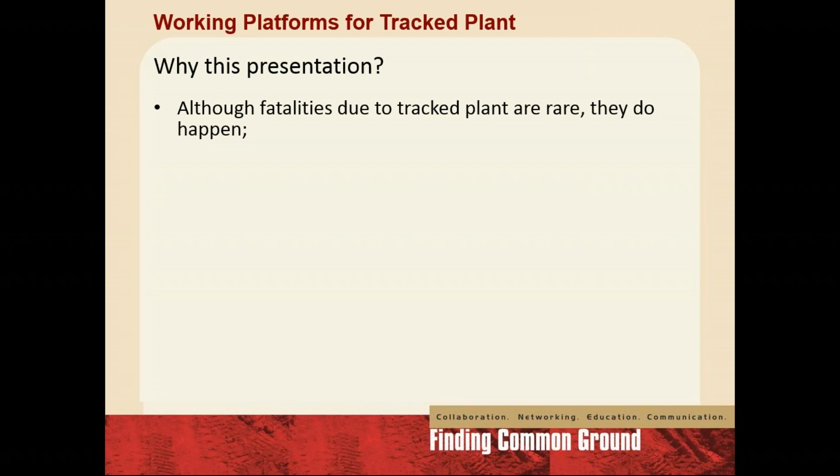Why this presentation? Although fatalities due to rigs and track plant toppling over are rare, they do happen. And we know that worldwide, the safety record for the construction industry is very poor. So if we can raise awareness of safety issues and make our sites safer, we can reduce the economic and human cost of poor working platforms specifically.

And who knows, through today, we actually might save somebody's life down the line.

So I just want to cover some experiences with what we've found in the UK, particularly through an organisation called the Federation of Piling Specialists, which is a UK organisation. It's affiliated to the EFFC, the European Federation of Foundation Contractors, and it's a trade organisation comprised mainly of practitioners.

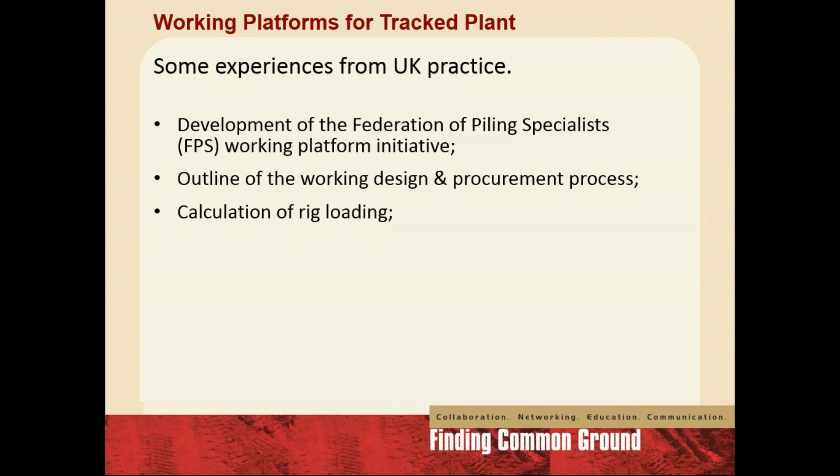So they developed a working platform initiative, and it's a whole process. I want to cover a little background about what that process looks like, and then go into more detail regarding one aspect - if you're going to design a working platform, you've obviously got to know what loading is applied to it. Then we have a spreadsheet tool, which is freely available, which I'll go into in more detail. And then once you've got the loading, a little bit on how the platforms are designed.

Now, if we go back to early 2000s, it was recognized that the incidence of piling rigs falling over because of poor platforms was too high, and it was something we could do something about. So that's why the Federation of Piling Specialists, the FPS, launched their working platform initiative. They wanted to promote safety, but in a way that was economic and sustainable.

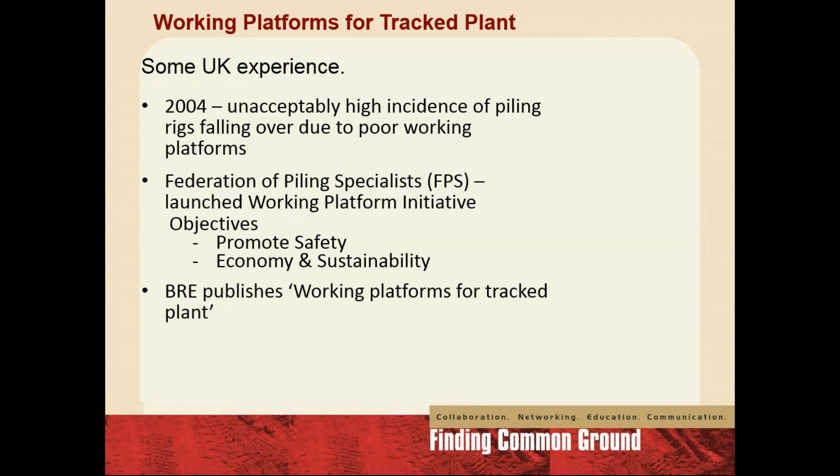They did a lot of work themselves, but then engaged an organization called the BRE, the Building Research Establishment, which was at that time a quasi government body that held the leading position in research and development in the UK. And they published a document, a little book called Working Platforms for Tracked Plant.

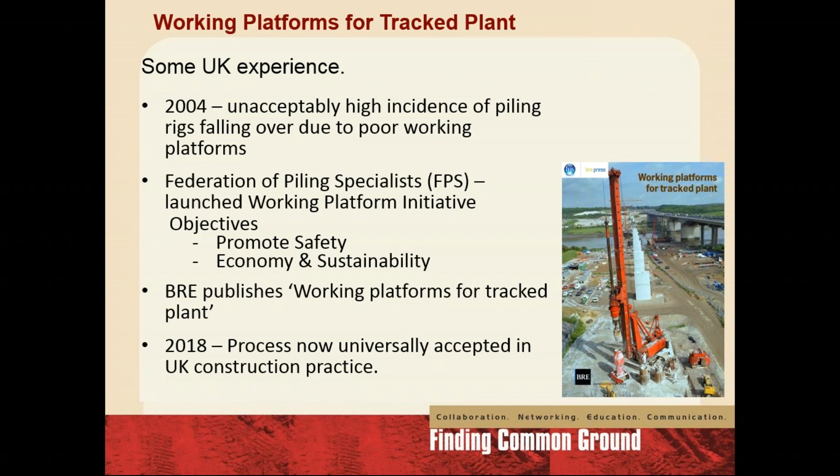This appeared in 2004, and since then the whole process for providing working platforms, not just for piling rigs and the like, has seeped out into wider industry. Obviously cranes are the next thing you might think about, but track plant, raised platforms, wheel platforms and that sort of thing are also now covered by some of these aspects.

In terms of creating a safe working platform, there are numerous facets and aspects to consider. I sat in yesterday at the working group meeting here, and we were talking about sort of bubbles, and within each bubble are different areas and aspects of creating a process to improve our safety.

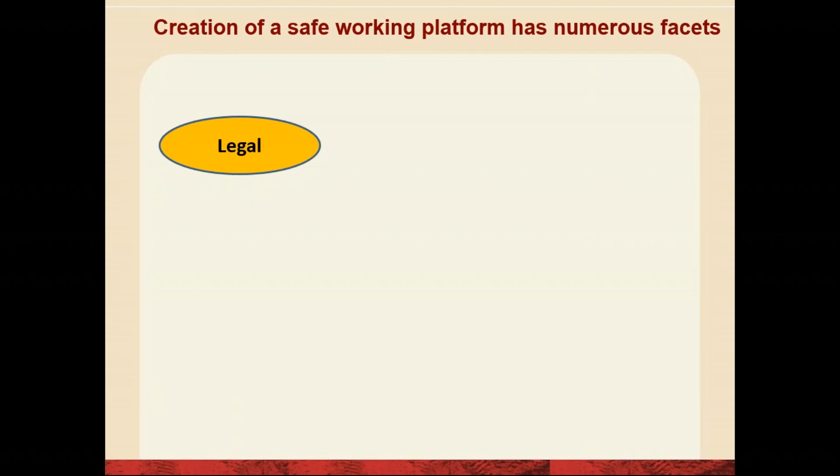So one is the legal framework. Another aspect is what is your contractual and commercial relationship with your client - you've got on your construction sites the controlling entity, who is the person overseeing the whole site. What's your relationship with them? My experience working for Keller in the UK for many years - as a subcontractor, you feel like you're at the bottom of the food chain sometimes. So how do you influence?

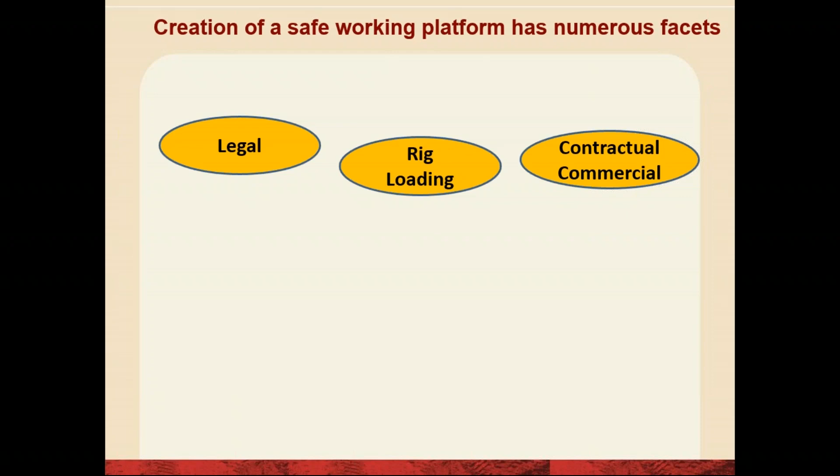Then, obviously, if you're going to design a platform, you need to know what forces are being put on that platform. So that has to be considered. And then you have to do some calculations to come up with the platform thickness.

The construction of the platform obviously has to be in accordance with the design. One challenge is that we can do a design based on a borehole or trial pit at one discrete location, but if we've got a 40,000 square foot site for a warehouse, how do we make sure our design section is applicable across the whole site? How do we inspect the formation before we put the platform down, to make sure we haven't got unforeseen holes or service trenches that haven't been properly backfilled? So construction is a very important aspect, as is validation.

How do you validate your platform? In the olden days, it was the foreman's boot, the heel of his boot, but really I think we've all realized that kind of doesn't really cut the mustard anymore.

And once the platform is being used, it has to be maintained and, if necessary, repaired. There was one UK incident where there was a piling site, and the platform had been put down in a good way, had been well designed, the rig loadings were understood, and a piling rig went over.

Later investigation found that over the weekend, somebody had come in to do a service diversion, which they had done. They hadn't fully backfilled the trench, although they had reinstated the granular mat over the top of it, and the rig, when it tracked over that improperly backfilled trench, went over.

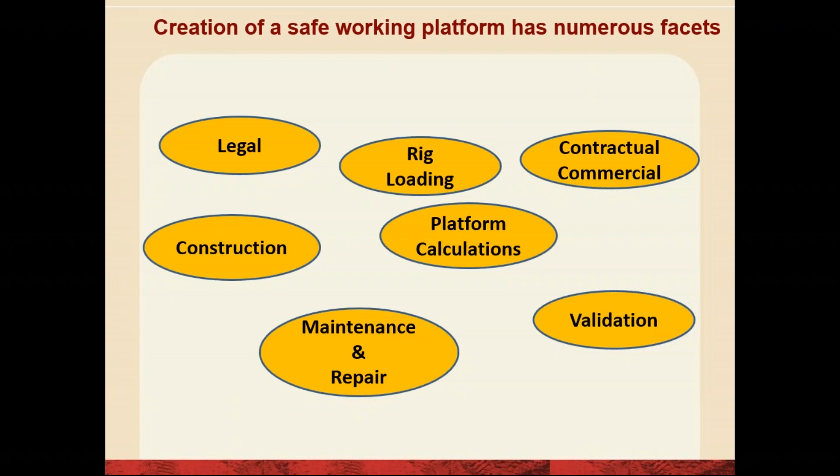And all of these little bubbles fit in a bigger bubble, which is, you know, we've got to try and be cost effective, and we've got to really be trying to add value as well as making things safe.

And of course, there's another thing we often don't consider, which is our moral obligations. I'm kind of quite big on this, really, for no other reason than we want our guys and girls on site to come to work in the morning and go home at the end of the day. If we can improve the chances of them doing that, that is good.

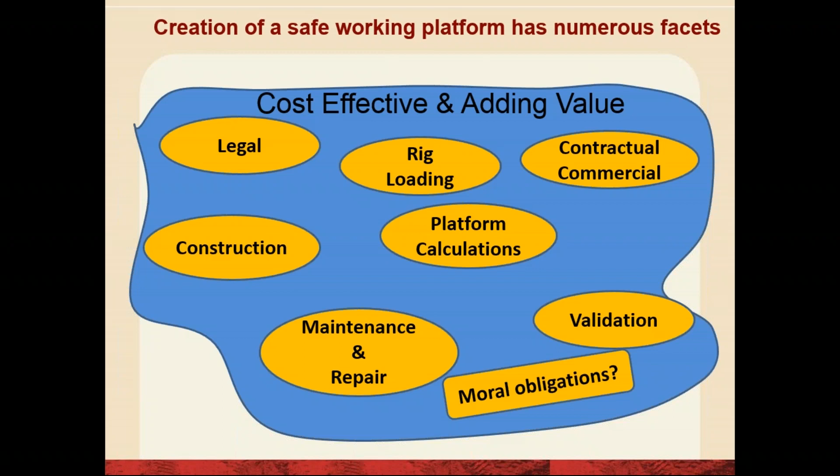I read a horrendous statistic. I was looking at a website, I think for the US Department of Labor, and it said that over the lifetime of a construction worker, say 45 years, there's a 1 in 200 chance of them being killed. I'm not saying the UK is significantly better, or other parts of the world are significantly better, because we know that worldwide construction is not as safe as it should be, but that's a horrifying statistic.

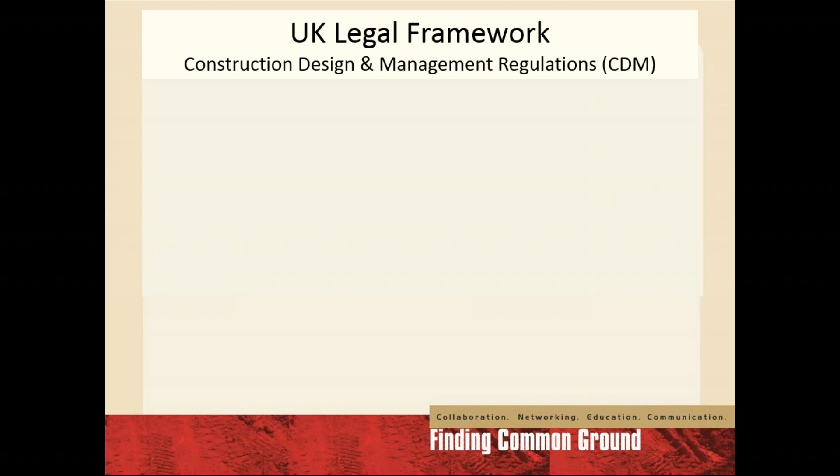So I just want to outline a little bit about the UK legal framework, because this is the way we do it, but if other people are going to take on some sort of process and initiative, it's going to have to be framed to suit your environment.

So we have what we call the client, who's the person developing a site. They have responsibilities under law to make sure they are appointing people to look after health and safety.

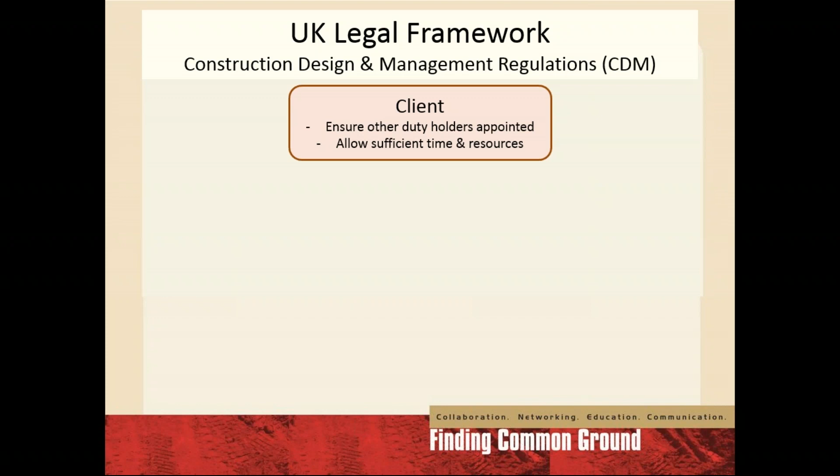At the design stage, pre-site work, there's an entity called the principal designer, and they have to identify, eliminate, and control the risks that they can foresee. And if there are sub-designers, the principal designer has to make sure that they are fulfilling their roles.

So you can argue that the principal designer is also responsible for ensuring there's enough ground investigation information to design a safe working platform, because they have to have thought about how whatever they're designing can be built in a safe way. And then when it gets to construction, you have a principal contractor.

Now this may be your controlling entity. I'm not sure whether it's that person or whether it's the client. But when it gets to construction, they are responsible for planning and managing and monitoring all aspects of health and safety.

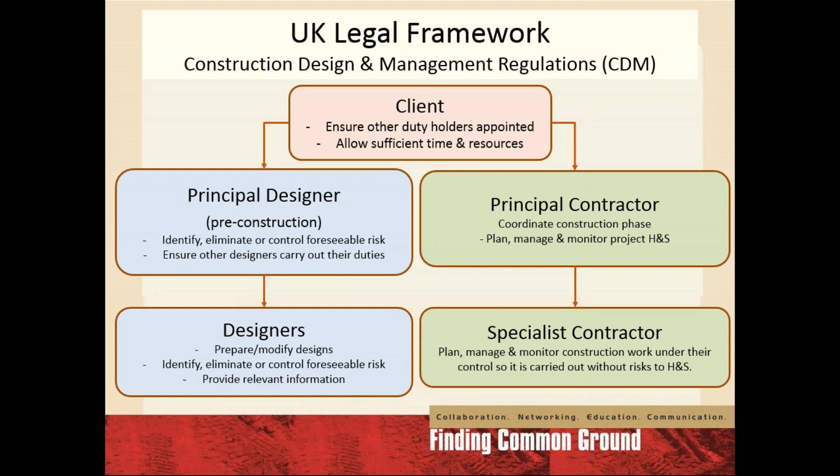And then if we have our specialist geotechnical contractor, they sit underneath the principal contractor. They do have responsibilities to make sure their work is carried out safely, but that's under the umbrella of the principal contractor.

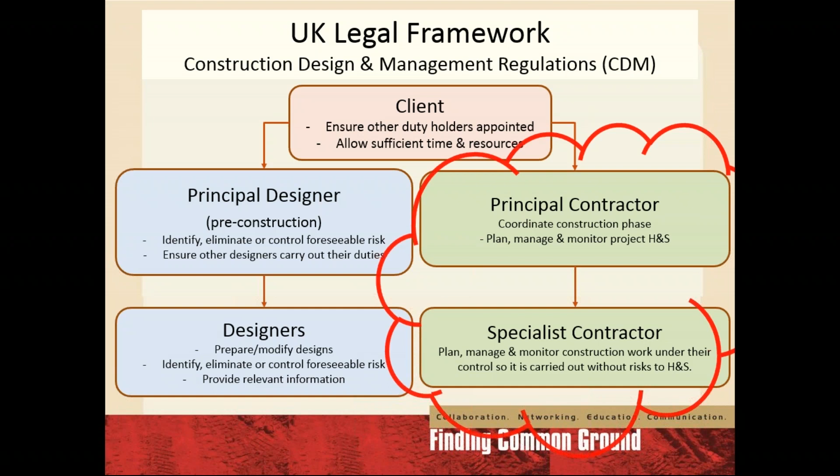And really, when it gets to site, it's the people in that red cloud, and it's that area we're often talking about where we're operating.

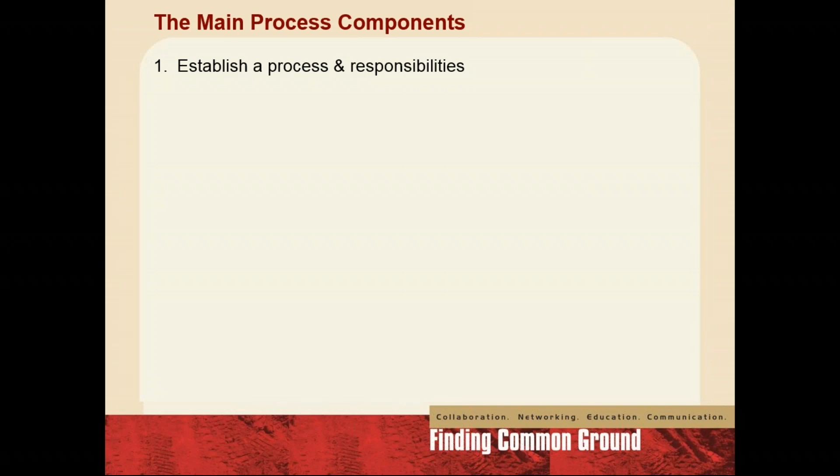Okay, so the main process and components we follow is, firstly, you need to establish a process, and you need to establish who is responsible for what. Once that's done, then you get into the nitty-gritty technical stuff.

You can establish the site conditions, so you need to know what the ground is, and topography is also very important, particularly if there's going to be cutting and filling going on, because the borehole or trial pit commencement level may not be your working platform formation level.

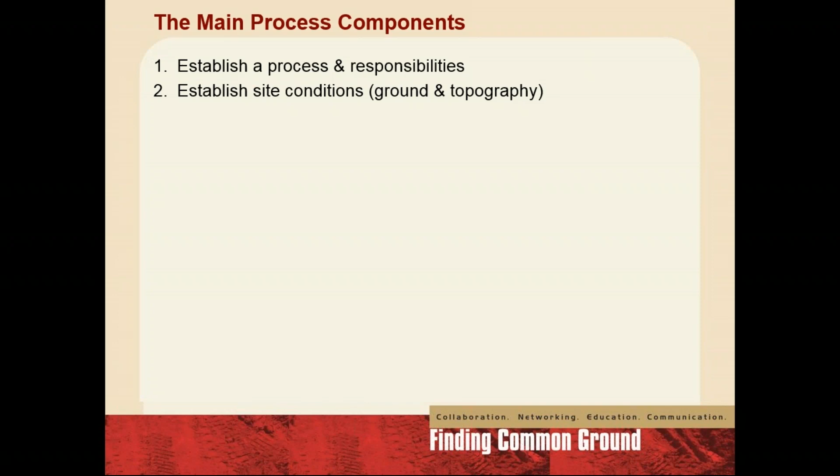Then you obviously need to design the platform for your known loadings, and we'll come to that in a little bit more detail in a minute.

Then you design your platform, so you obviously assess your subgrade strength, you select your platform material, and if you're going to use geogrids or geocomposites, select what they might be, and then do some number crunching, some design calculations to give you a platform thickness.

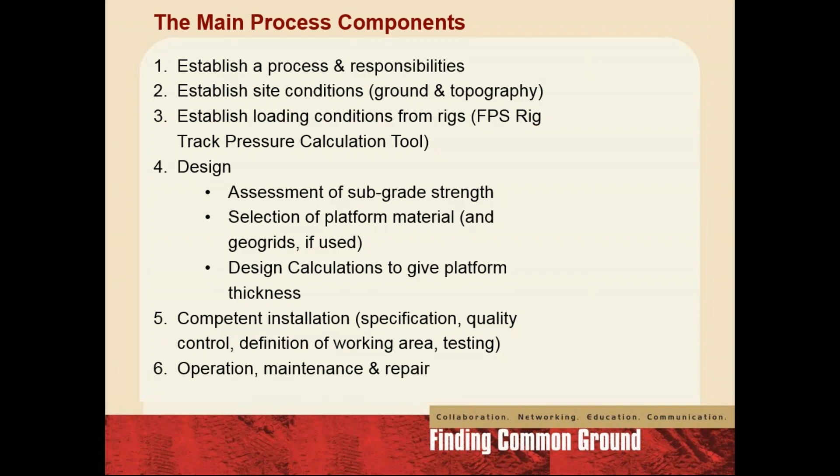But it doesn't just stop there. It's very important that there is competent installation. So you need a specification, there needs to be some sort of quality control, some definition of the working area, and testing maybe of the platform. That vigilance needs continuing through operation, maintenance and repair. And to embrace all of these aspects, you need some sort of management or control system.

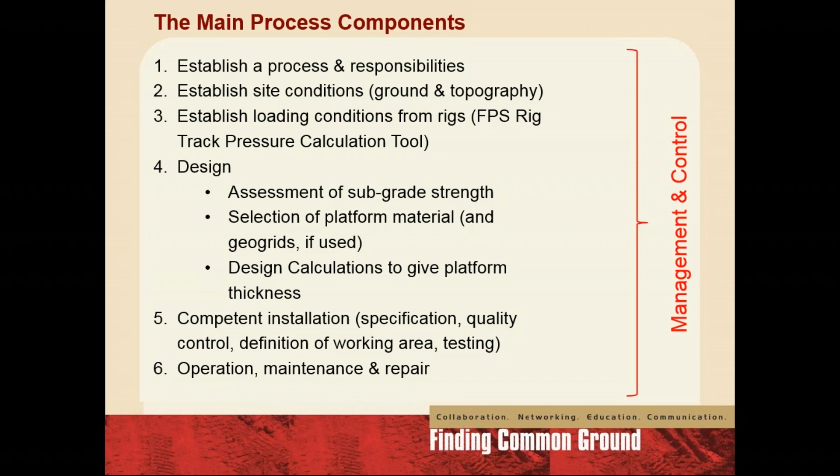In the UK, that's done through a very simple form. We call it the Working Platform Certificate. I'm led to believe the word certificate can have a bit of a loaded legal connotation in the US, so you could call it the Working Platform Form. Perhaps there's too many forms, but something simple to help guide us through the process.

It summarizes what the project is, what part of the project you're working on, and what loading the working platform has been designed to operate under. It puts the designer's name, an individual, so we're identifying and naming individuals now, creating where the responsibility lies, the designer organization, and any testing that is required.

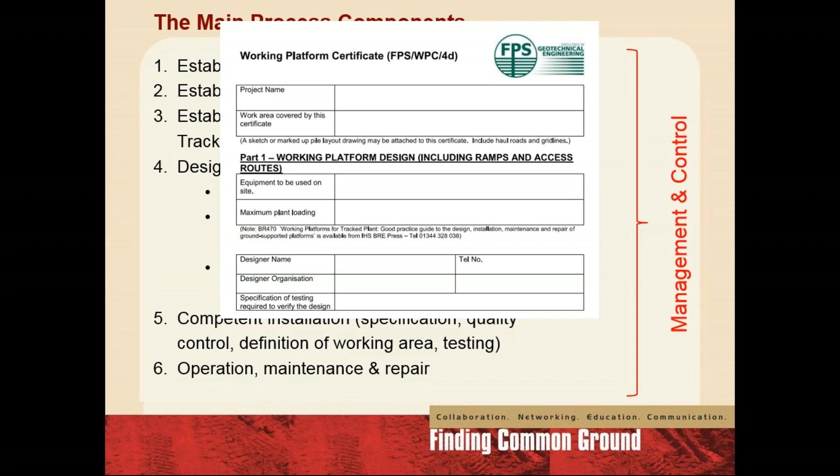And then the principal contractor, which maybe in your circumstances would be the controlling entity, has to sign in ink or blood to say that they are confirming the platform has been correctly designed, correctly installed, and will be correctly maintained before the piling contractor goes onto the site.

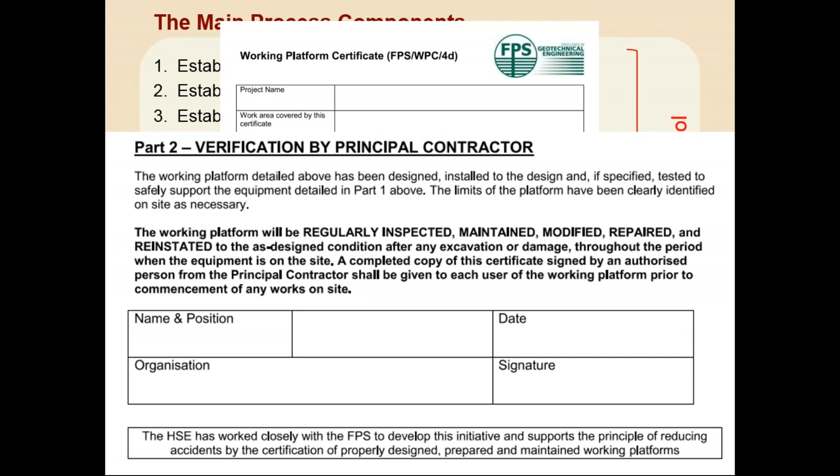In 2004, the FPS had created an earlier version of this form, and they collectively said, we are not going to work on sites unless the principal contractor has signed this form. At that time, there was a lot of wailing and gnashing of teeth, particularly from maybe some less well-informed clients. They said, oh, this is dreadful, this is dreadful. But the FPS members stuck to their guns. And in time, it's been recognized throughout the industry, not only for FPS members, but also non-FPS members now, that they're not going to go on site unless this form has been completed by the principal contractor.

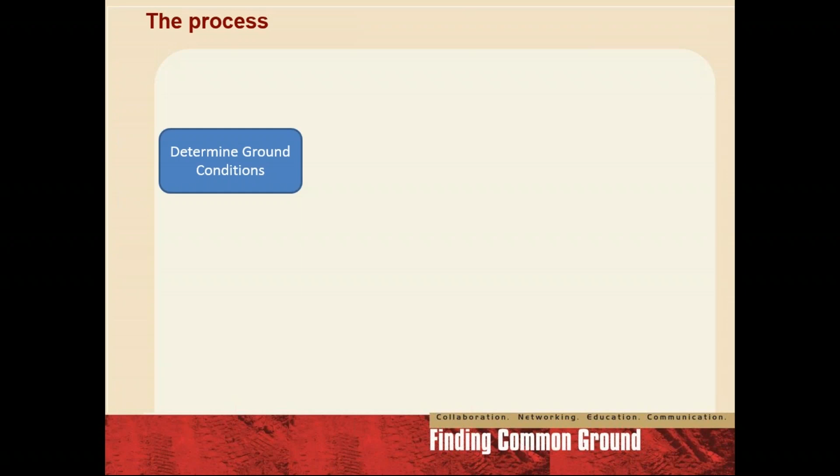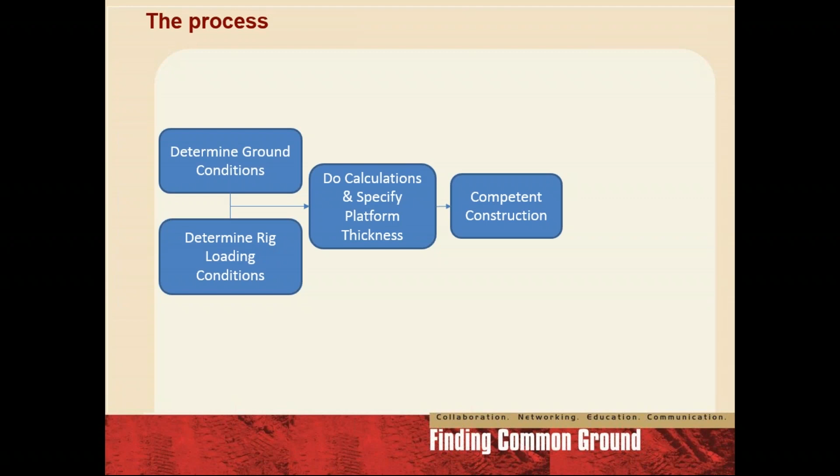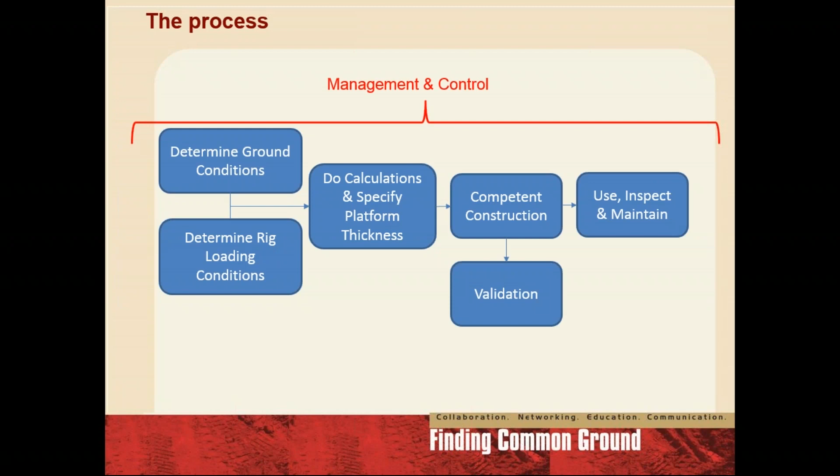So just to summarize the process, or show it pictorially: once you've established your responsibilities from a design point of view, established your ground conditions, determined your rig loading, done your calculations to determine your platform thickness, had some construction done by a competent person, validation perhaps required, you then use, inspect, and maintain until the end of the life of the platform. And that's all overarched by this management and control process.

The title of my talk this morning was prefaced as a workshop. And what I want to do now is go through, very quickly, a tool that's freely available. It's an Excel spreadsheet tool, which was developed by the FPS in the early 2000s and has undergone some fairly recent revisions to make it a bit more user-friendly.

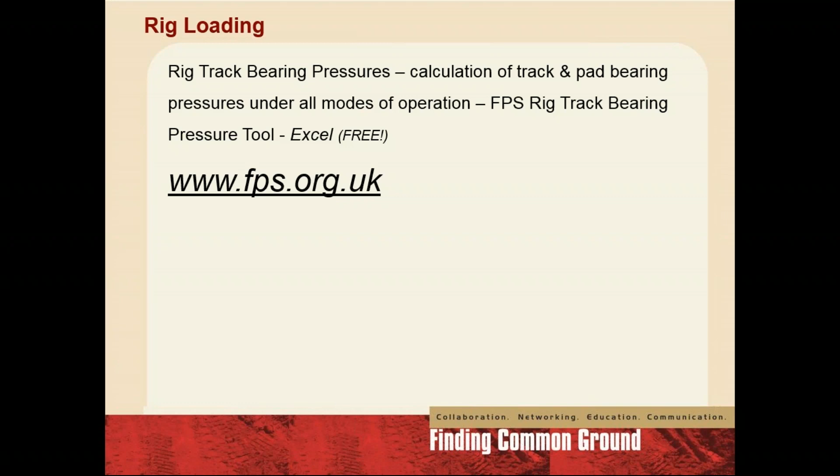I think it's going to be quite difficult in this environment to really get down to the nuts and bolts of that. But if you've got internet connection, you may go to www.fps.org.uk, and you'll find the website, which if I go forward looks like that. You can click on the little button and download the spreadsheet for free. There's guidance notes there as well, and some examples.

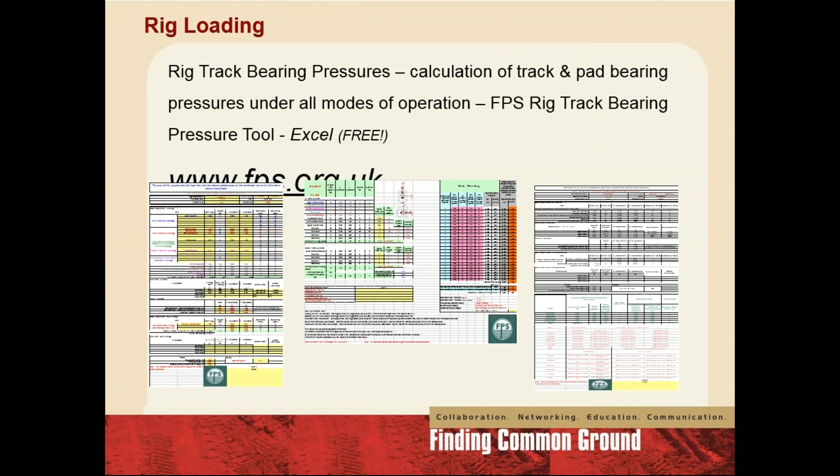So the spreadsheet tool comprises Excel forms that you complete. The aims of the tool were to try to make it as simple as possible to use, something that would give consistent and reliable results, and it would cover most of the usual piling rig situations. It's routinely used for the larger rigs, even 100-ton rigs, down through the more routine ones we have in the UK.

I think you call them auger cast piles, we call them CFA piles, CFA piling rigs, anything from 80 down to 30-odd ton machines. It's also used for the mini rigs, going from the 1 to 2 ton machines up all the way to the 100-ton machines. It's for the most usual situations, really implementing the 80-20 rule. There will always be exceptions, but these need to be considered as exceptions, again by a competent person.

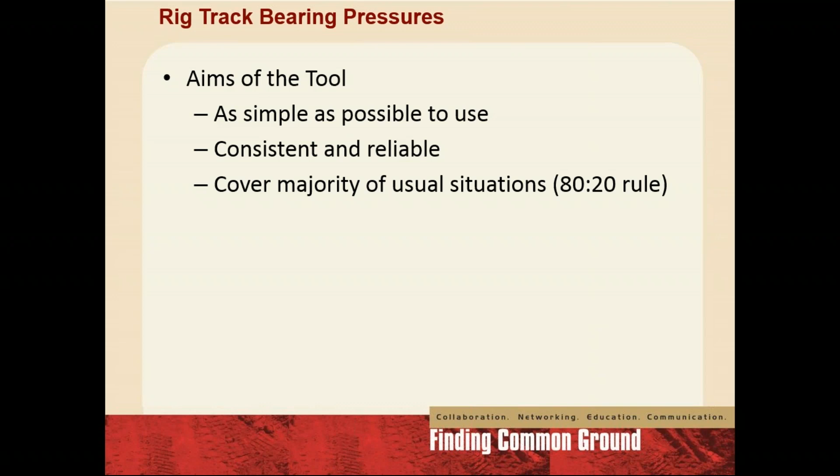As I said, the tool's freely available, and there's some guidance provided. In the UK, we do run training courses, usually half-day long, and people actually come along with their laptops and are guided through examples, given the theory and the background. That means people are being trained in the use in a consistent way across the country.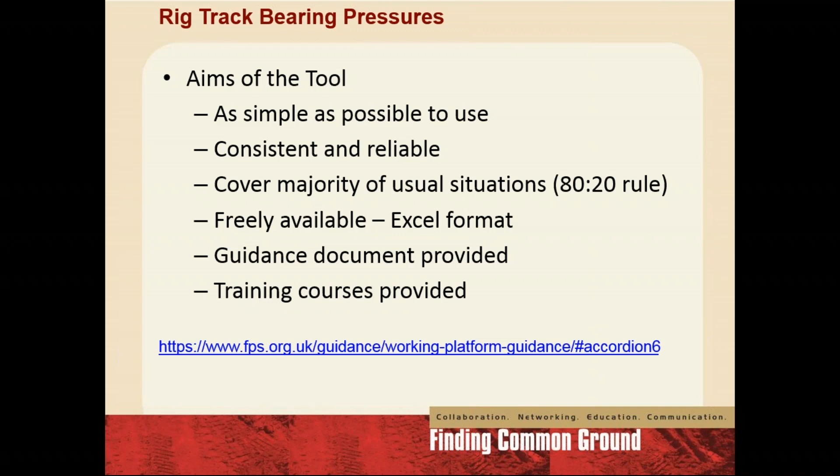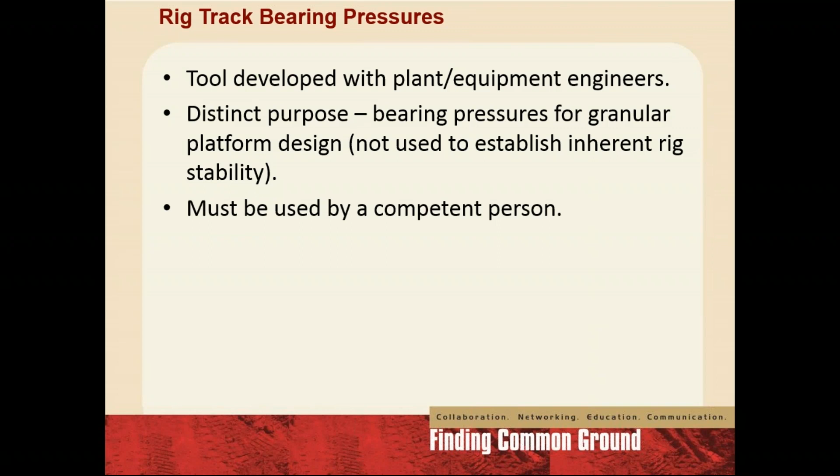The tool was developed by engineers, including a lot of people on the plant health and safety side of the construction industry. It has a distinct purpose: to assess the bearing pressures that are applied by rigs on granular working platforms. It's not used to establish inherent rig stability—there are other codes and standards that do that. And really, the term competent person is quite crucial here. My definition is a competent person is somebody who will have knowledge, hence the training, and some real-world experience of what rigs look like and how they work.

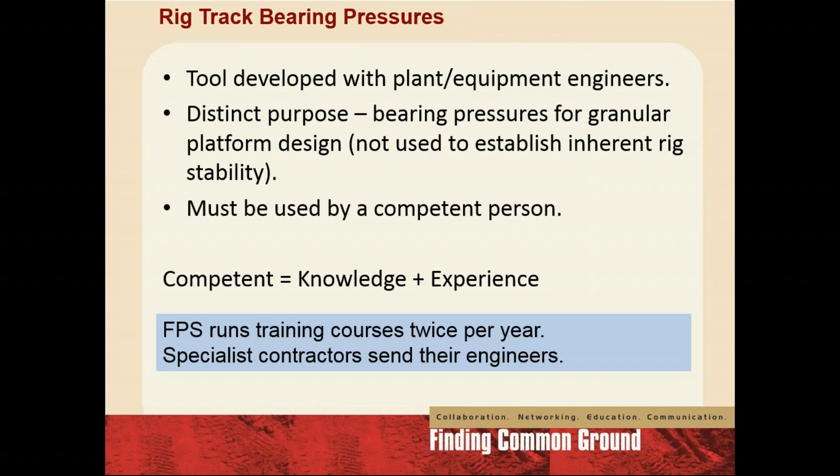Okay, so we've just seen that's the spreadsheet. Sorry, that's the website. If you go to the FPS website, you can click one of the little boxes and download the tool. So what does the tool do?

It calculates the track, and if you've got footpads or outriggers, their bearing pressures. It considers all the different modes of operation of a rig, and if it's a slewing rig, all the slew angles. And then the output has to be compatible with the platform design method.

And if we go back to the document BRE 470, working platforms for tracked plant, which again you have to buy, but you can buy it off the internet from the BRE website, it does give a design method. There are other design methods as well for the actual working platform.

Essentially, the spreadsheet has 3 main components spread over a number of worksheets. The first, as you'd expect, is the data entry. Obviously you're not going to be able to read this, but you can see it looks fairly daunting, but isn't really that daunting when you get into it. So you put basic data in there.

There are then provided with the sort of routine download, 6 spreadsheets that will consider different modes of operation of a rig. So there's the standing mode, there's the traveling mode, so that is the rig obviously tracking around.

Handling, which may be for preformed piles, precast piles, tubular piles, can be quite critical. Could incorporate unloading from lorries and what have you. Then there's the penetrating mode, the extracting mode, and I'm going to come and talk about those in a bit more detail in a minute because they're treated quite specially, the penetrating and extracting modes.

And then you've got a spare spreadsheet, but if you know the password to unlock the spreadsheet, you can of course add many more operating modes if you want. And then there's an output summary.

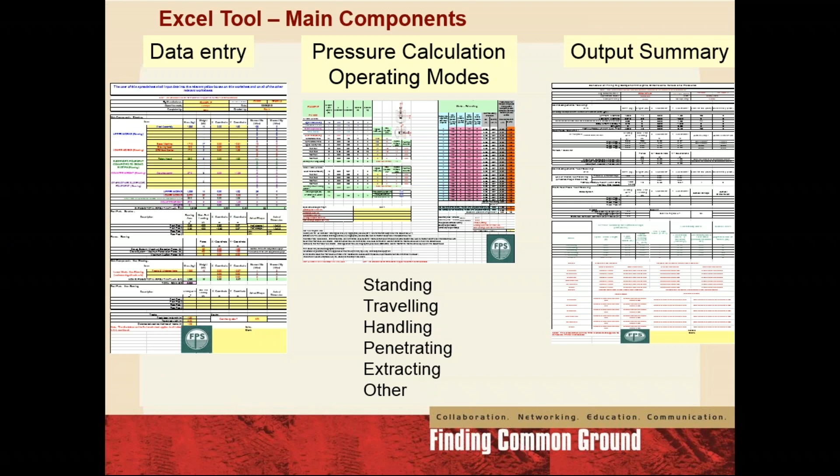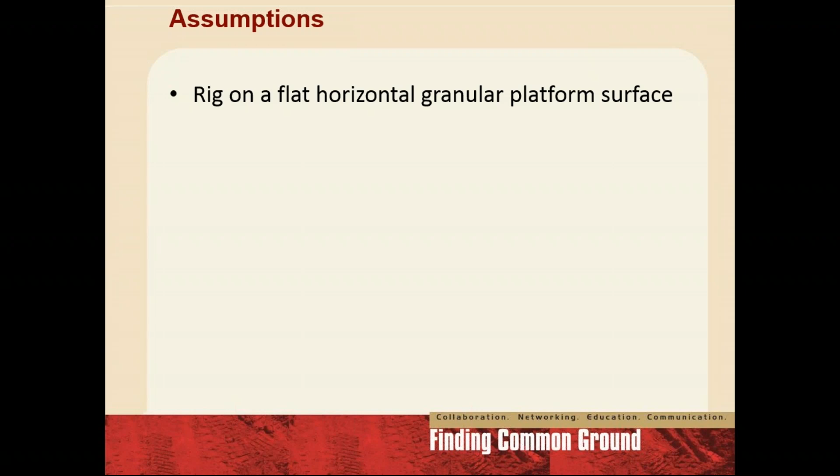So some of the basic assumptions we're working with here is that your rig is working on essentially a flat, horizontal working platform, not on a steep slope. And we use a rule of thumb of about 1 in 20, anything less than 1 in 20 gradient as being considered flat. And the forces derived from the use of the rig

are vertical. If your winch forces, the assumption is that they are operating vertically and you haven't got large lateral loading. And that your rig is not going to be exposed to high wind loads, high slewing loads, and high dynamic force loads.

Now, the resistance to the rig, the thing that stops it falling over, is provided by the tracks. And if you've got any outriggers or footpads, they're also considered.

As I've already said, the masts and winches are considered to be operating vertically, you'd have to go in or do some pre-processing if you're going to start imposing lateral or semi-lateral loading.

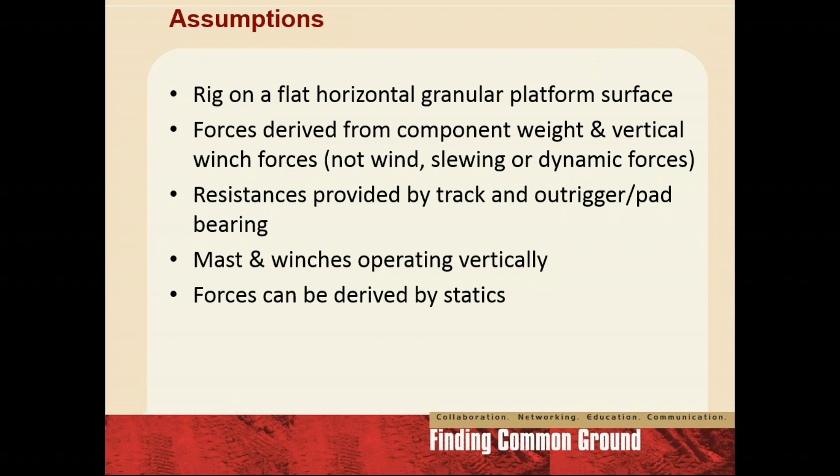The forces that we will use to calculate the bearing pressures are derived by statics, so fairly basic engineering and maths. And obviously another assumption is, and it comes back to the use of the competent person, that they know what they're doing.

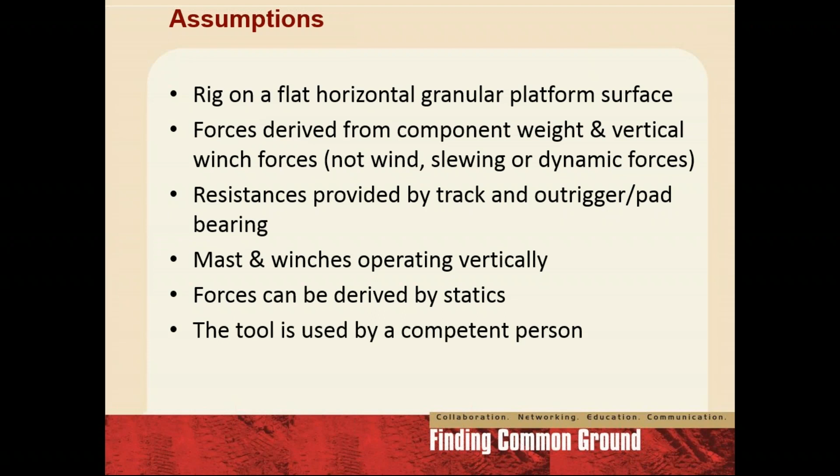So, for example, you'll need to know what the weight of the tracks is, and the tracks are the non-slewing components of the rig at the bottom, the main body of the rig, counterweight, all that sort of stuff, which are part of probably the slewing components, mast, etc.

You need to know their weights, and you need to know the distance from the center of rotation of the rig, or the centroid of the tracks, where those weights are applied.

Finding that information from rig manufacturers' documentation has improved quite significantly. Most modern rigs, certainly within Europe now, and their manufacturers will provide this information quite readily.

Maybe if you've got older rigs, or if that information is not so readily provided by the rig manufacturers, you might have to go to the time and effort of taking bits of your rig off, weighing it, and measuring where its center of gravity is with respect to the middle of the tracks.

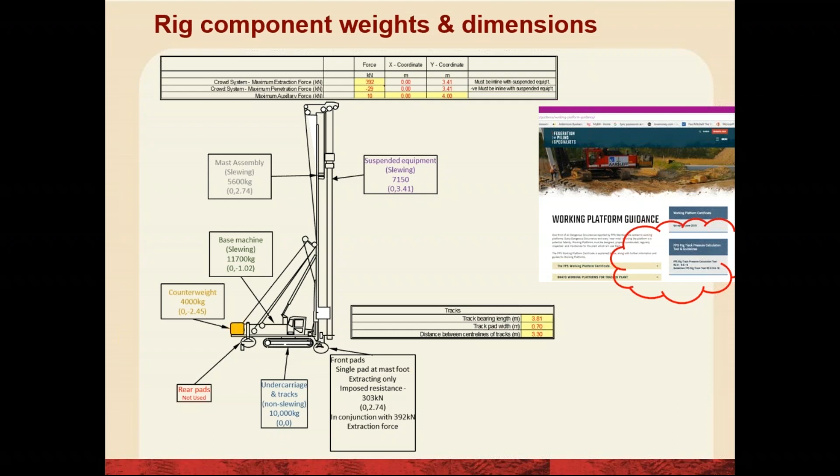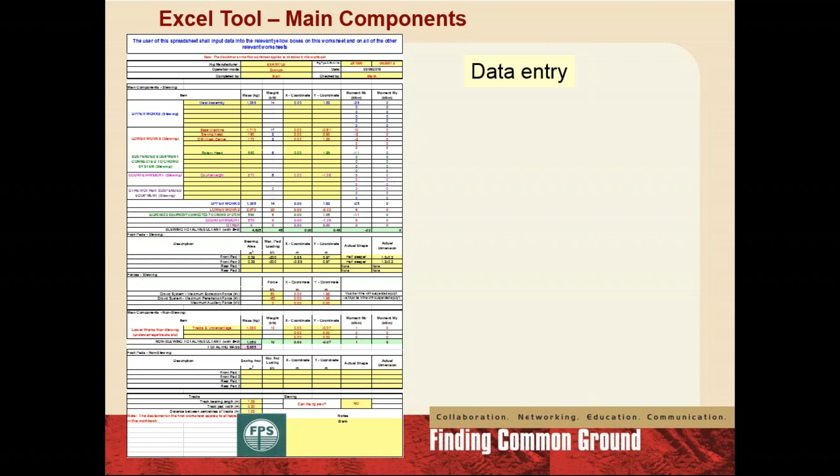Pressure calculation, which covers the different operating modes, and this is really the engine of where the calculations happen.

The basic principle is that we just consider the static equilibrium equations of the rig in its working configuration. So whether it's standing, it'll have certain forces applied. If it's traveling, it'll probably be the same forces applied as standing. But if it's handling, penetrating, or extracting, there may be winch forces that we need to consider.

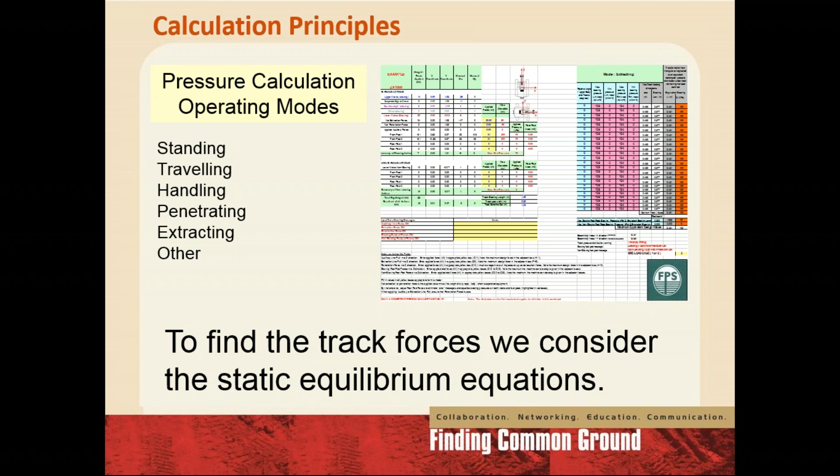And we can consider them fairly simply, really. Because we know the weights of the different components and we know the distance of those components from the centroid of the tracks, we can take moments, and we know our vertical equilibrium equations because we know the rig is sitting on a platform, and we know the resistance. Sum of the resistance generated by the platform has got to equal the weight of the rig plus any winch forces.

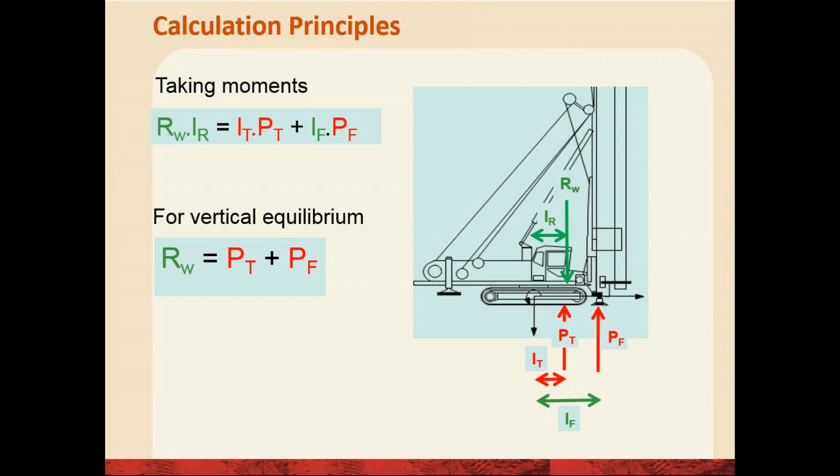And if we've got a foot pad, that's also part of the equation. Now, the trouble is, if we've got a rig with 2 tracks and 1 foot pad, and we look at our equilibrium equations, we discover that it's a statically indeterminate problem, so we can't solve the equations.

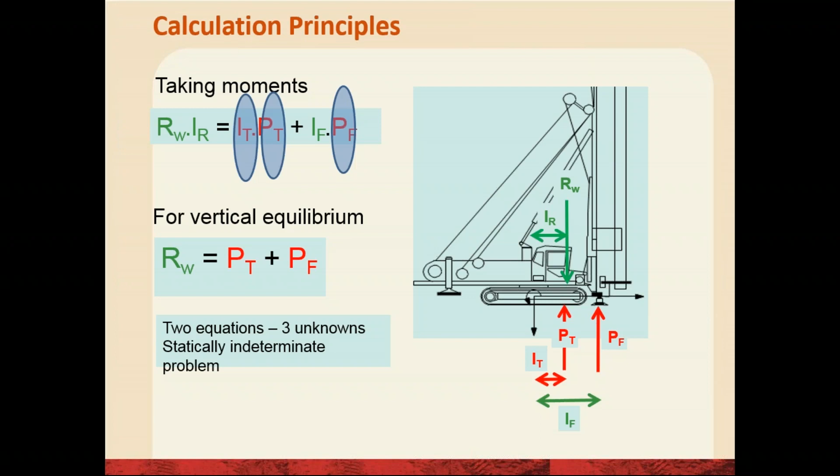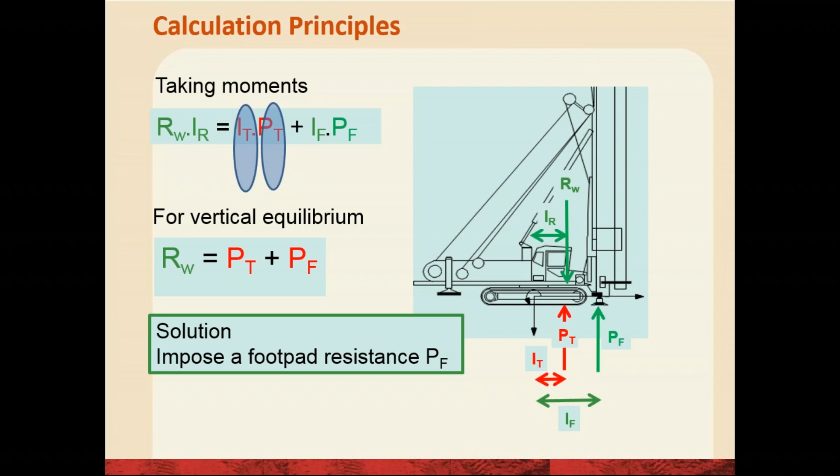And the way around this was to allow the operator to impose a foot pad resistance. And by doing that, we render the equation statically determinate, and we can solve the problem and then work out what the bearing pressures are. Now, it's really very important just to remember that when we put in our foot pad resistance, when using the tool, it's only a device to make the equation statically determinate.

Whether that foot pad will ever feel that load, we will rarely find out. And what we do within the tool, when we impose the foot pad load or foot pad resistance, is we iterate till we get to a point that the bearing pressure under the foot pad equals the bearing pressure under the tracks, and then design the platform for that bearing pressure and the worst case loaded area.

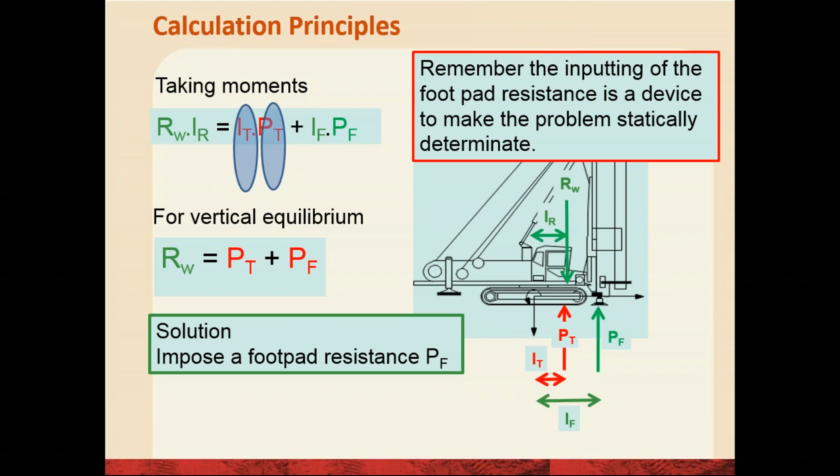So the calculation principles are: we input the component weights and their coordinates on an XY sort of grid, assuming in the first instance that the slew angle of the rig is 0 degrees. We input a foot pad resistance if the foot pad is indeed being used. If it's not being used, then obviously you don't put it in.

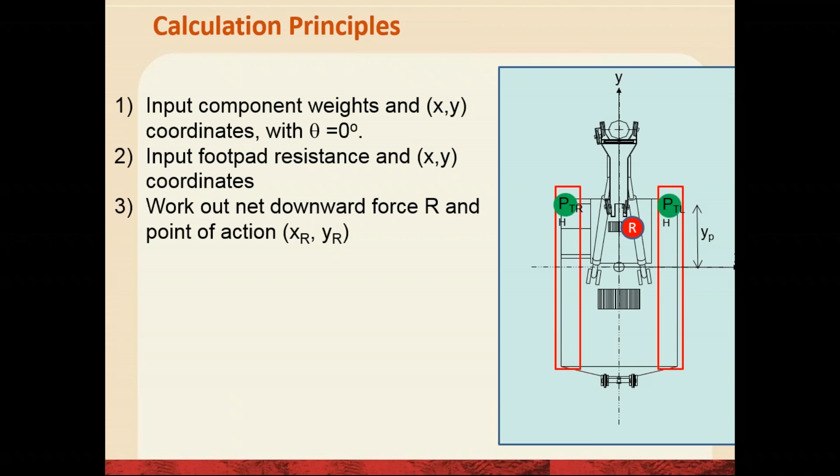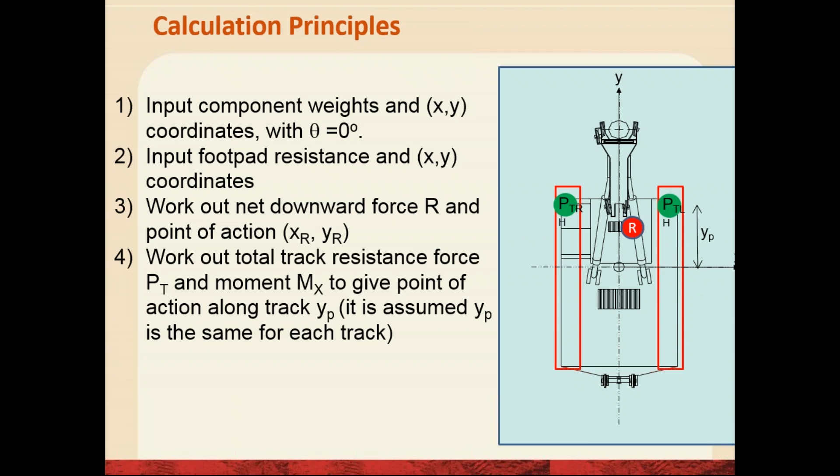Then we can work out the net downward force, which is the red blob, and its point of action in a coordinate form. And from that, we can work out what the resistance needs to be provided from the tracks. We can take moments to see whether there's more load on one side than the other.

We work out where the resistance on the tracks is with respect to the track length. If it's right in the middle, the bearing pressure distribution under the track is just rectangular. Obviously, if that point of action of that resistance moves away from the center of the tracks, the bearing pressure distribution first becomes trapezoidal and then can become triangular.

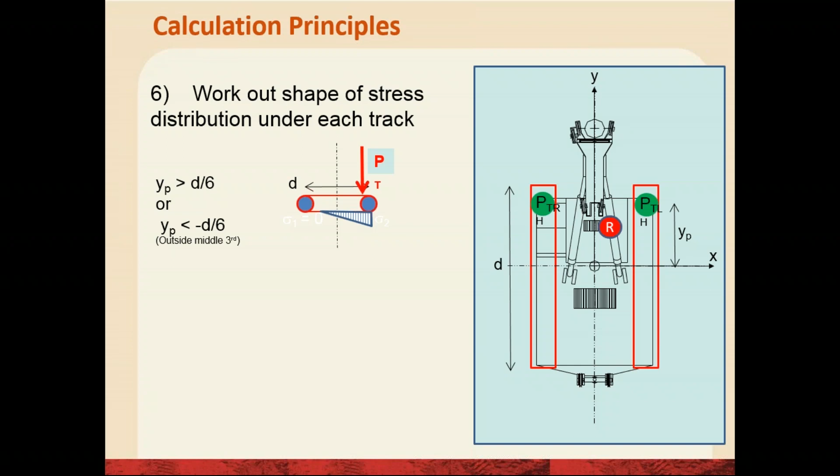And if you've input stuff wrong, or you're trying to work out a calculation where actually the rig's unstable, the point of action or point of resistance would fall outside the track. Now, the spreadsheet tool, basically, if you get to that point, stops working and you won't get an answer because something is obviously clearly wrong.

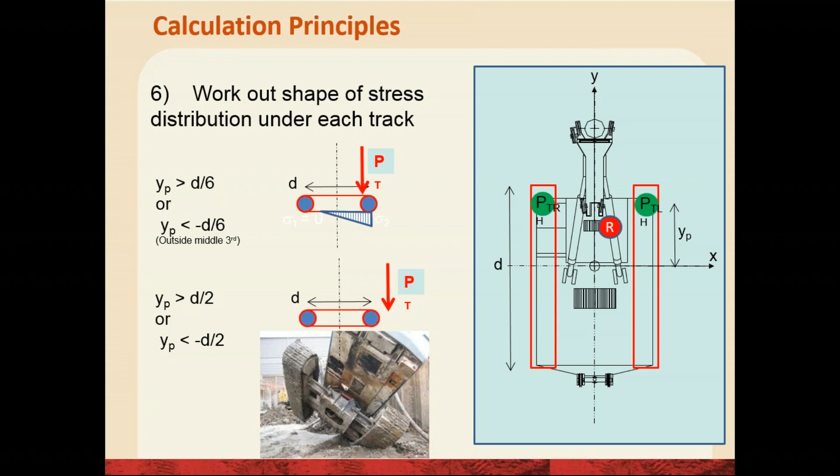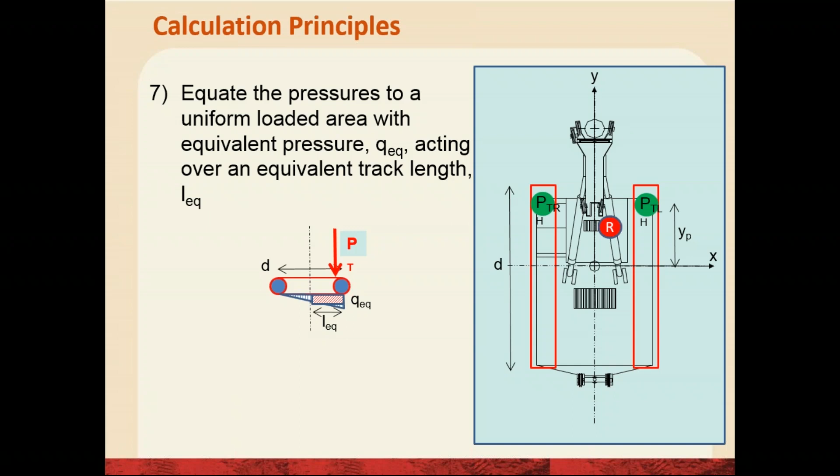Once the spreadsheet has worked out the stress distribution under the track, that's equated to an equivalent rectangular distribution, fairly basic soil mechanics. And then that process is carried out for every angle of slew for a slewing rig. Obviously, if the rig's not a slewing rig, you only need to do the one calculation.

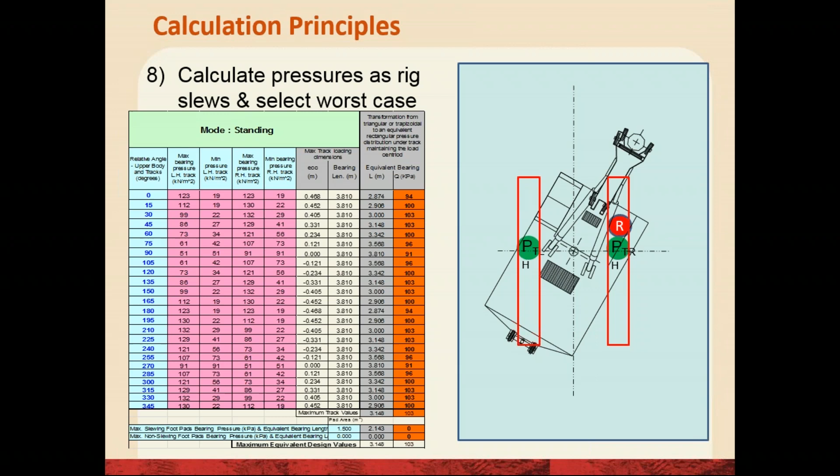There's another element recently introduced to the spreadsheet. It was felt that people doing working platform design, and in particular working out bearing pressures, weren't necessarily sure under a given operating condition how close the rig might be to the resultant resistance falling outside the footprint of the tracks, causing the rig to be unstable. So this measure called the eccentricity index was introduced, and it's just a measure of where that resultant force is - the red blob within the footprint of the tracks.

It has to be emphasized that this is not about calculating the inherent stability of the rig, because to do that, certainly in European standards, you have to calculate something called the stability angle, which is no help to us as designers of working platforms.

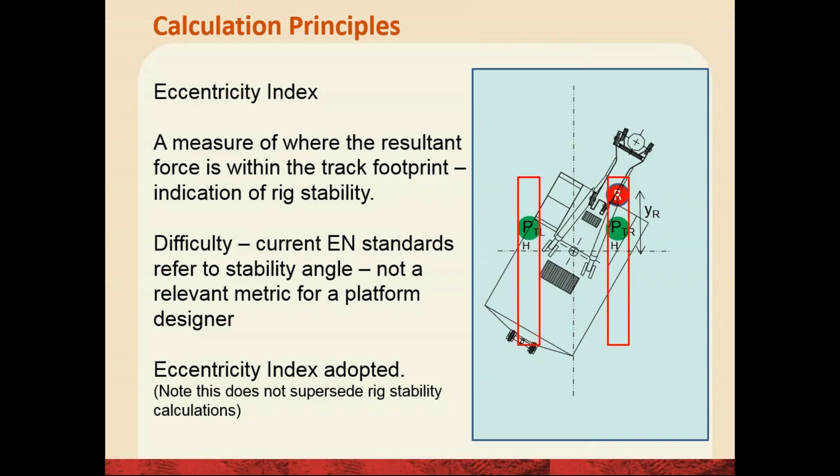So the eccentricity index is basically the ratio of where that resultant action is with respect to the track footprint. If the value is less than 0.33, the resultant is in the middle third. If it's between 0.33 and 1, the rig is probably stable, but you may end up with a triangular distribution of pressure under the tracks, implying the rear of the track is lifting. There are various warnings in the spreadsheet that highlight that situation. It doesn't necessarily mean it's unsafe to operate the rig in that condition - it's just a warning to flag that.

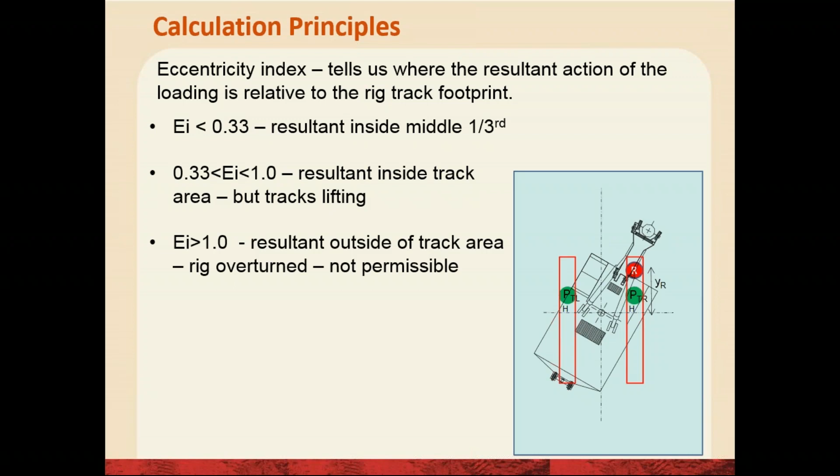Obviously, if the eccentricity index was greater than 1, it would mean the rig had overturned, and the spreadsheet will not return a result if that situation arises.

Now, with the penetrating and extracting modes of operation, in order not to become overly conservative when applying winch forces, a couple of little tricks were implemented.

If the rig is in the standing mode and the head and the digging tool or auger on the Kelly bar is withdrawn and above ground surface, the weight of that suspended equipment - as it's termed in the spreadsheet - forms part of the rig weight. In the input page we've put in the weights and points of action of those bits of equipment. But when you start penetrating, the weight of that suspended equipment can be considered to be taken by the ground, because it's actually resting in the ground. So your rig weight effectively becomes slightly lighter.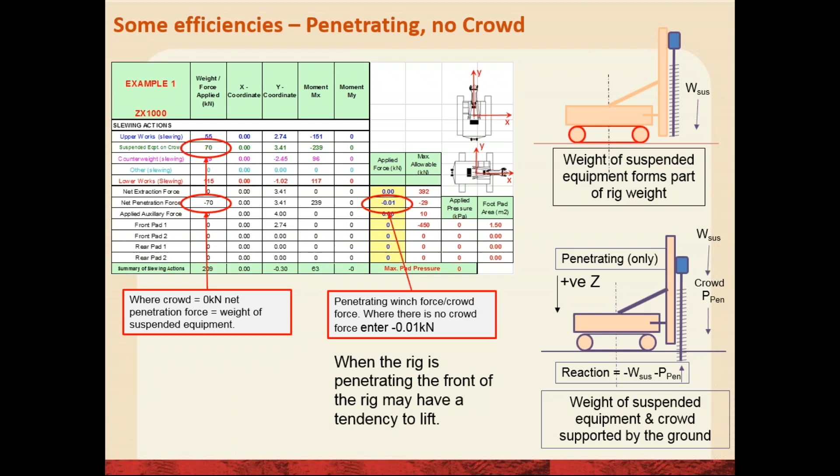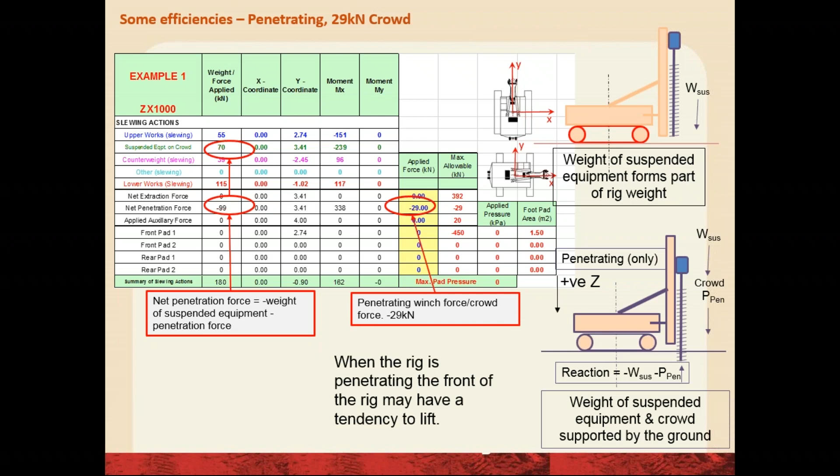If you have a crowd force - this is an example of a 29 kilonewton crowd force - your net penetrating force is minus the weight of your suspended equipment, summed with the crowd force, to give in this case a net penetrating force of minus 99 kilonewtons.

When extracting, a similar process is followed. With the tools in the ground, the net extraction force you're putting on your winch to lift the tools out of the ground - firstly, part of that force is simply taking the weight of that suspended equipment, and since you've already accounted for it, you don't want to double count. Only the leftover force available to overcome soil resistance needs to be taken into account. So in this example, though our applied winch force is 392 kilonewtons, the weight of our suspended equipment is 70 kilonewtons, and we don't want to double count, so our net extraction force is 392 minus 70, equals 322. It's very important that the operator of this tool understands what's going on here.

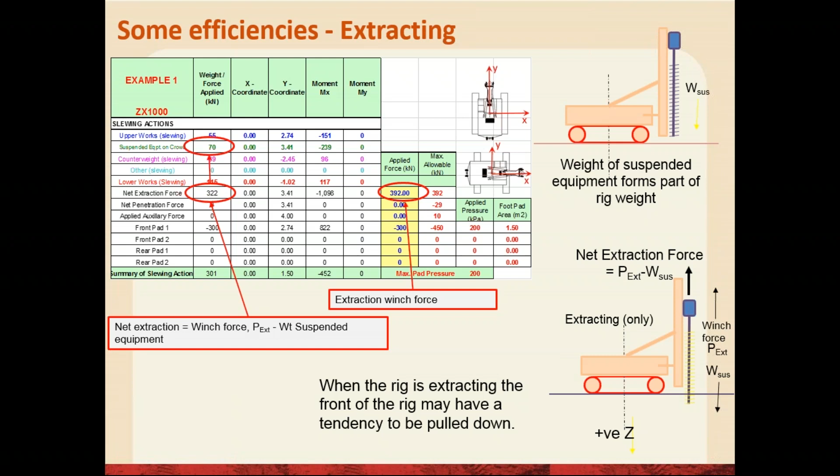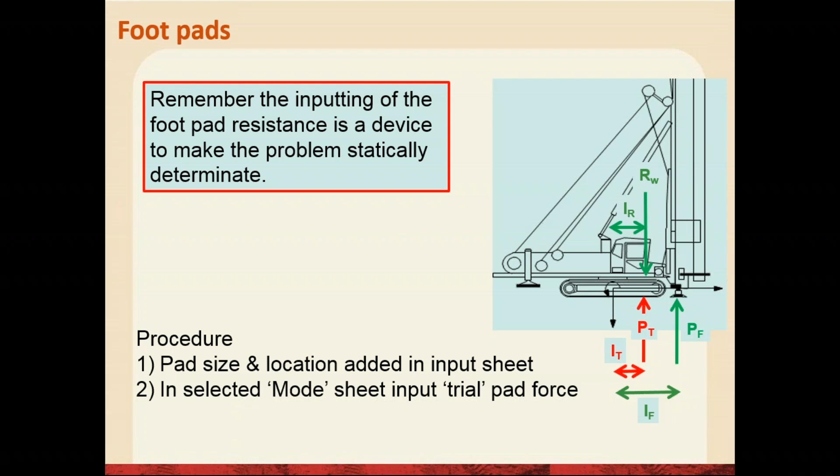On the topic of foot pads and how we deal with those - as we said before, inputting the value of foot pad resistance is a device to render the equilibrium equation statically determinate. What you do is input the pad size and location in the input sheet, then in the selected mode sheet input a trial force, observe the change it generates in the track pressures, and iterate until you get a balance. That might look something like this.

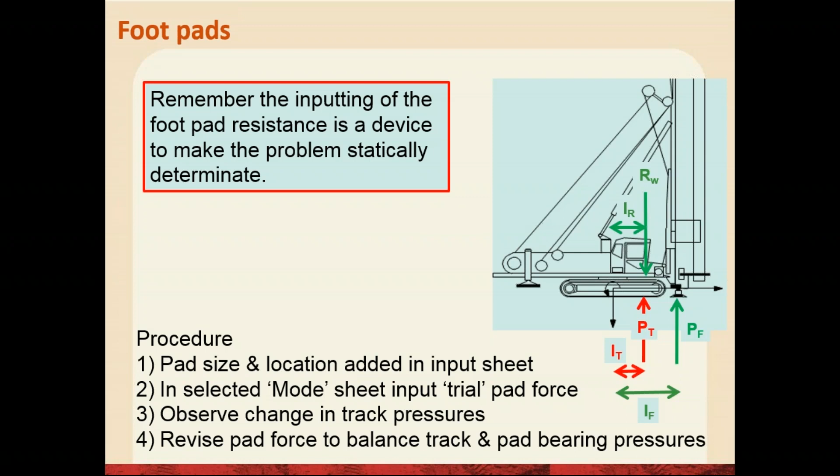On the left side of the screen you can see the mode sheet, and here we've got an applied foot pad pressure input of 200 kilopascals, with a foot pad area of 1.5 meters squared.

And then on the right, we've got the calculation of the track pressures, and at the bottom it also shows the 200 kPa that's been put in as the pad resistance, and that has been iterated. Now, we haven't quite got a balance. We've got 207 kilonewton per meter squared on the track and 200 on the foot pad, but that's near enough for a platform design. So that has to be borne in mind as well.

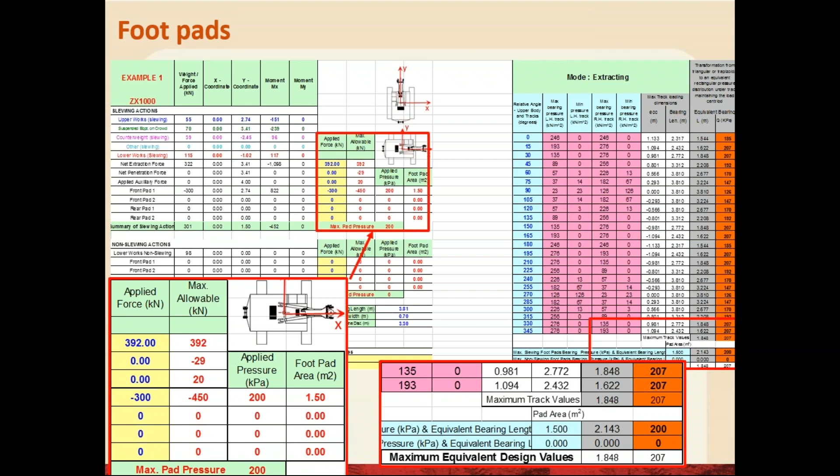So once you've done your calculations, the results are summarized on the summary sheet. There's a summary of the input data, and it's often only this sheet that's given to the actual platform designer. There's a summary of the output data and error messages and notes. So if something's gone wrong, there are some error messages and various notes, like, for example, if the tracks have got a triangular distribution, it's called track lifting, just as a flag, really.

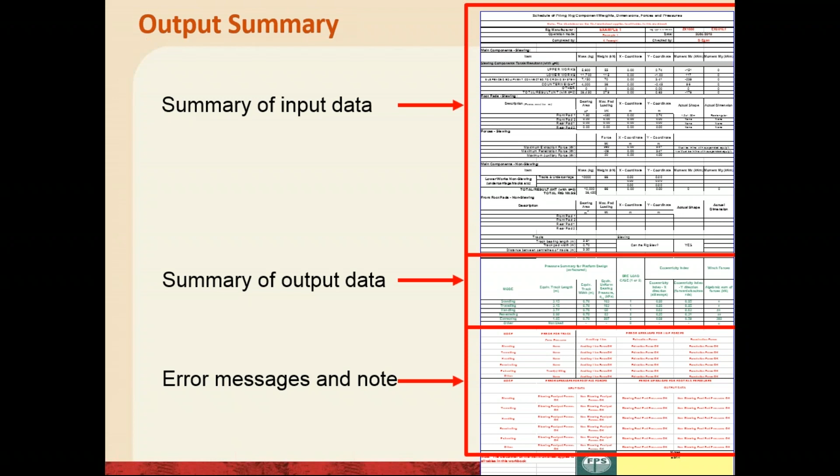So zooming in on the output data, you can see on the left the different modes of operation, the equivalent track length calculation, track width, bearing pressure. And in this case, what we note is the greatest bearing pressure is on the extracting mode. This is for a CFA rig. So it's sort of what to be expected.

And then you will note there's a comment that's called BRE load case 1 or 2. I'll come to that in a second or two. Then there's the eccentricity index, looked at parallel and perpendicular to the tracks, and those are all okay. And just for information, there's just the sum of the winch forces, just to make sure that you're aware of what winch forces are being applied and that they're not unrealistic.

So once you've got that summary, you can go and calculate the thickness of your platform. I say BRE 470 does give a fairly straightforward method, just standard soil mechanics really. But the method uses characteristic material parameters for the platform and the subgrade, and then certain loading factors are applied.

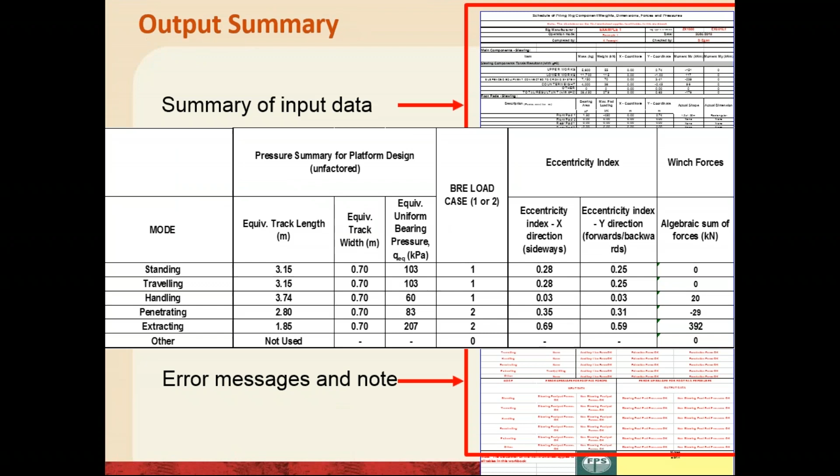And where recovery is possible, for example, if you were extracting and the operator felt the rig starting to tilt excessively, they could let go and ease off on the crowd force. So those loading factors tie into the BRE load case 1 or load case 2, and it's therefore just important for the platform designer to understand which load case the pressures that are output from the spreadsheet tool relate to, so they know which loading factors to apply in their calculations.

And it's also worth mentioning that although the BRE method has got a design approach in there, you could use other methods.

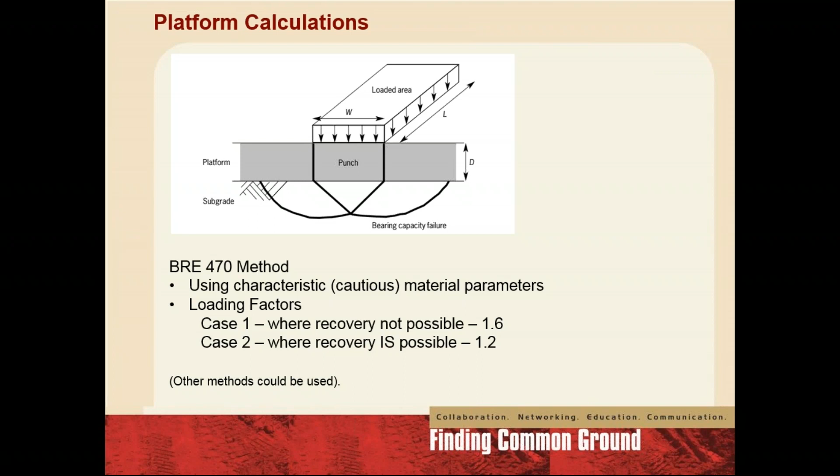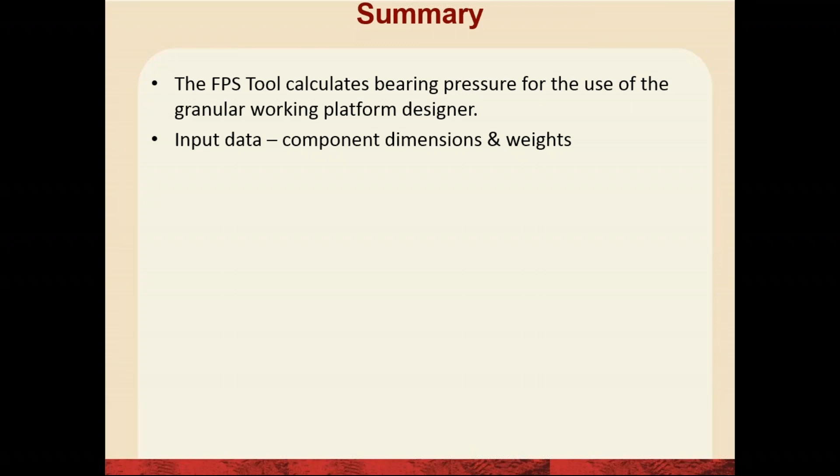So, in summary, the FPS tool calculates the bearing pressures for the purpose of giving them to the granular working platform designer. The input data is component dimensions and the weights. It's based on a rig working on a horizontal granular platform.

If you're applying foot pads, just remember that that's just a device to enable equations to be solved, and you need to know what you're doing. The eccentricity index might be a helpful just cross-check that the rig appears to be working in a stable fashion, but it does not replace a rigorous stability check. And there are, certainly in Europe, different standards that cover that.

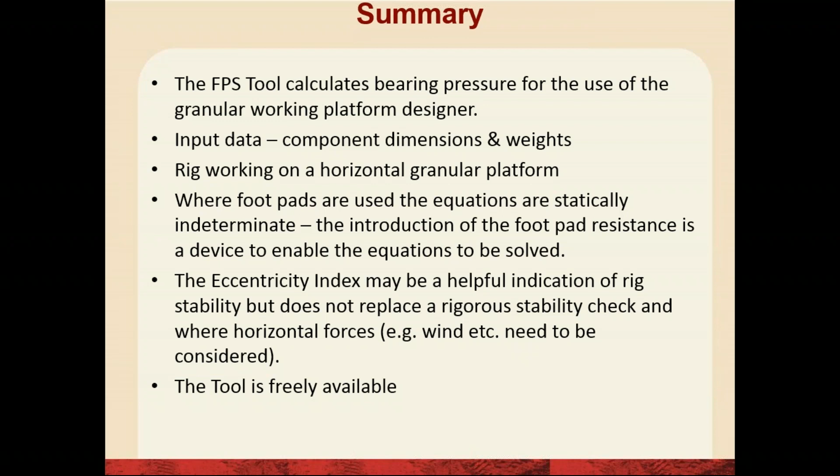And the tool is freely available. The FPS took the view that although they don't represent every piling contractor in the UK, safety was too much of an important thing to be parochial about.

And so the use of this tool fits in with this wider managed process undertaken by individuals who have clear responsibilities, using common input parameters, using a published calculation method, and verified construction and maintenance. And that's all managed by an overall control process.

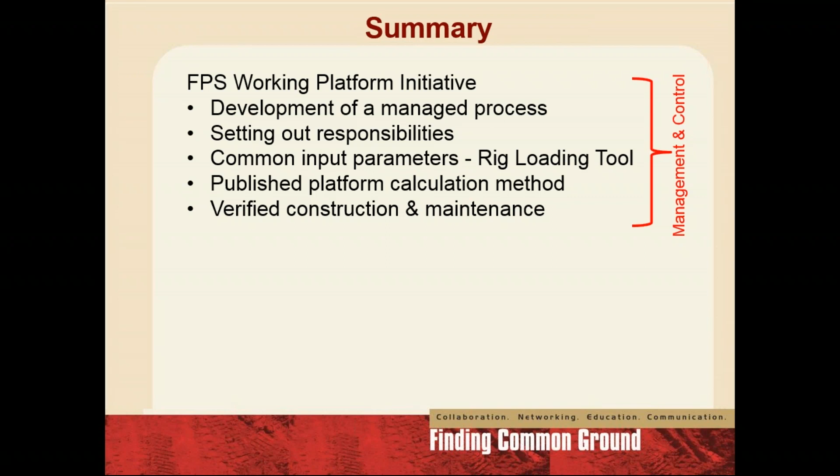And we're now 13, 14 years since the publication of BRE 470. It did drive industry change. Safety has been improved. The approach does have now a track record, and it has gained universal acceptance in the UK.

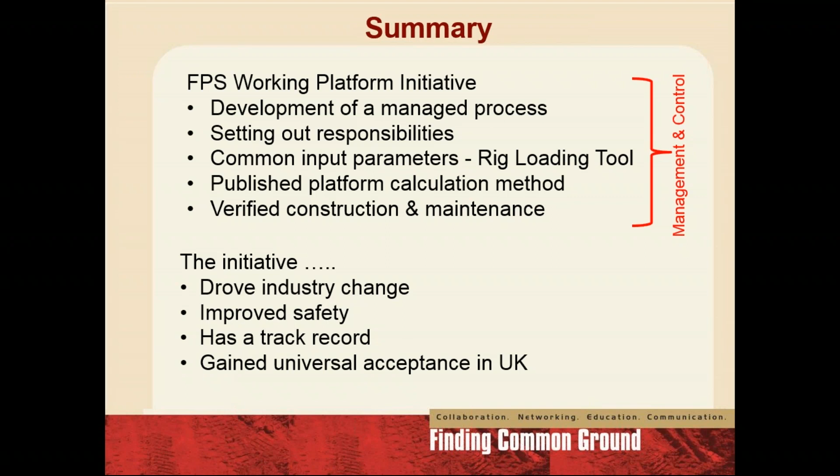If you find it helpful, bits of it helpful, please feel free to take all, some, or none of what this approach sets out. Thanks very much. Thank you.